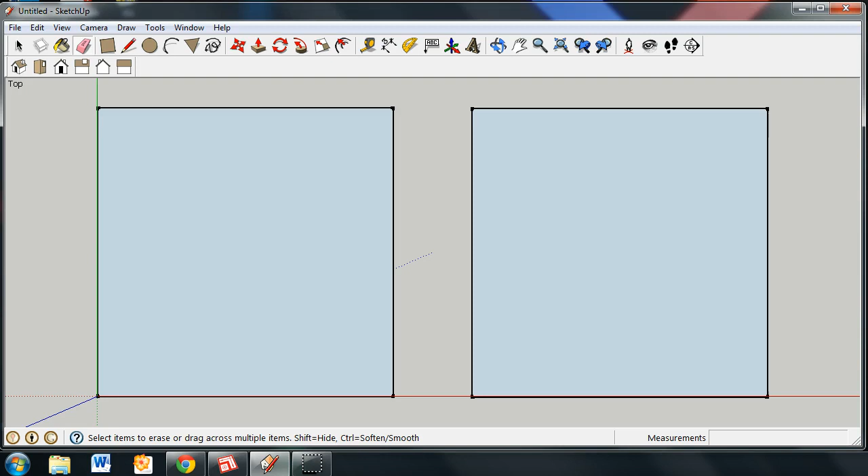Now that I have both of my squares created for puzzle piece number 1 and puzzle piece number 2, I'm now able to take the dimensions included on this drawing and start to put them into the other drawing, the 3D model we're going to produce.

What you're looking at right now is the orthographic drawing, showing what the side profiles will look like in puzzle piece number 1 and puzzle piece number 2. We need these dimensions included in our new drawing so we can create the 3D objects you've already seen in the previous videos.

Let's take the measurements you see here, and start off at the bottom left corner of puzzle piece number 1, calling that our origin, 0,0. For our x value we're going to go across 3/8 of an inch, and for our y value we're going to go 1/4 inch.

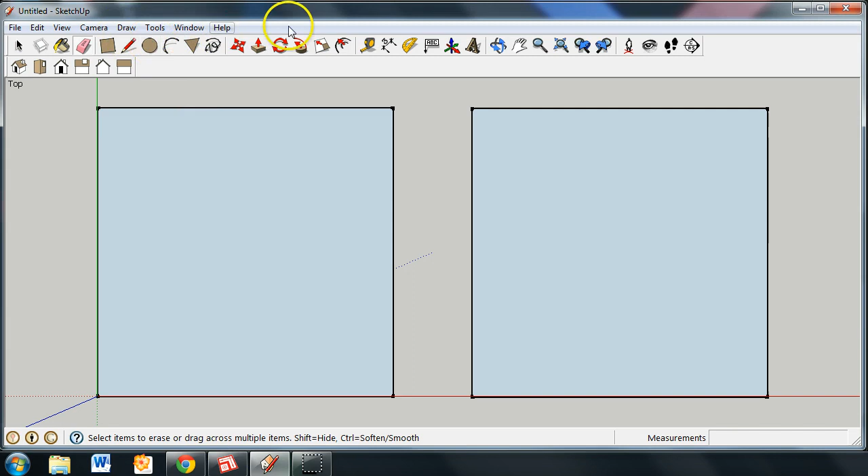I'm going to need those two measurements, so I'll go into my drawing and use my tape measure tool to mark where those measurements should go. I'll click once at the origin, trace up until I see 1/4 inch at the bottom right of the screen, and click once - there's a marking. Then I'll do the same along the x-axis until I find 3/8 of an inch, and click. Now I have two markings.

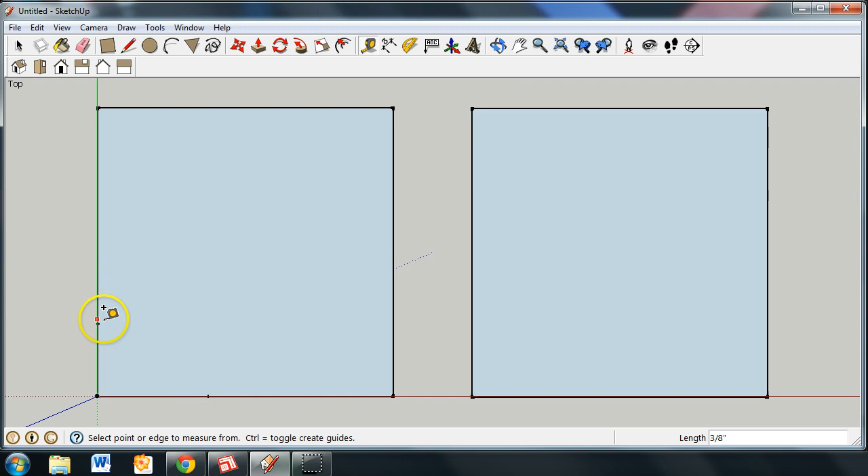Let's go back into the drawing. We notice a marking goes up here, and over and down. How high does it go up? Looking at this measurement, it's 1/4 inch, so it goes up 1/4 inch. Then over - how far over? We don't know by looking at this measurement, we have to look at the measurement at the top, 1/4 inch. So this little open cavity here is 1/4 inch by 1/4 inch.

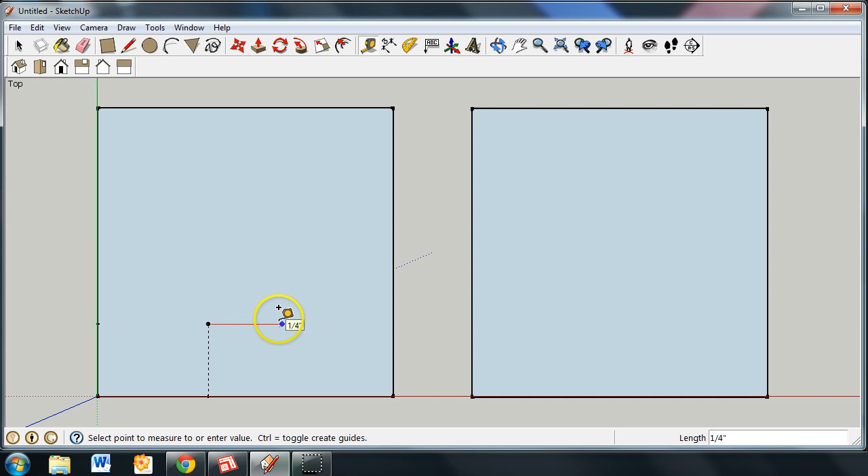Let's draw that out. I'm going to go from here, up 1/4 inch, and you see a hidden line or dashed line appears. Then I'm going to go over 1/4 inch, and back down 1/4 inch.

Let's go back in our drawing. We now have created this little gap here. The last thing I need to do is finish the top side, this left side right here - I've done the bottom side. So we've gone up 1/4 inch, and I need to make an open cavity here too, 1/4 inch deep, 1/4 inch high, and 1/4 inch deep going up again.

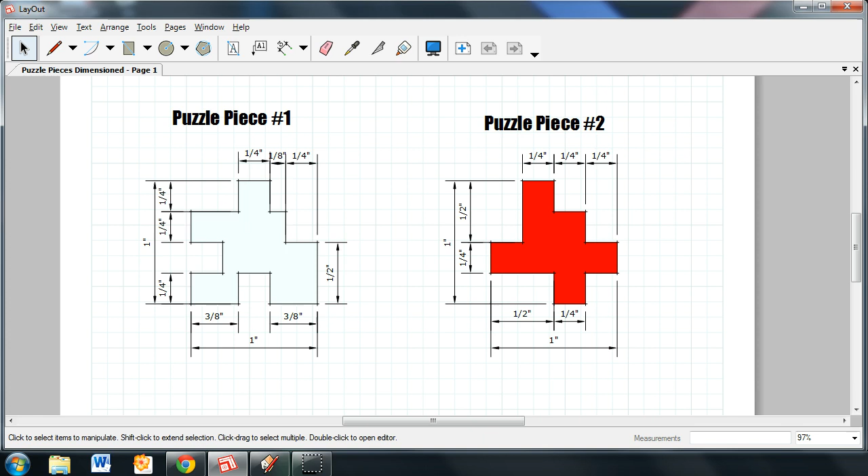Let's go draw those out by coming in 1/4 inch, then coming up, and then back over. Click, back over. Okay, so we're now starting to see what our drawing should look like.

It's going to go up 1/4 inch, and then over - what's this measurement here? 3/8 of an inch. So let's go up 1/4 inch, and let's go over 3/8 of an inch, and back up.

The next measurements I need to look at are these on this top part. I need to go over 1/4 inch, then come back down 1/4 inch, go over 1/8 of an inch, then back down 1/4 inch, and then over to the other side. I should be able to finish the piece up at that point.

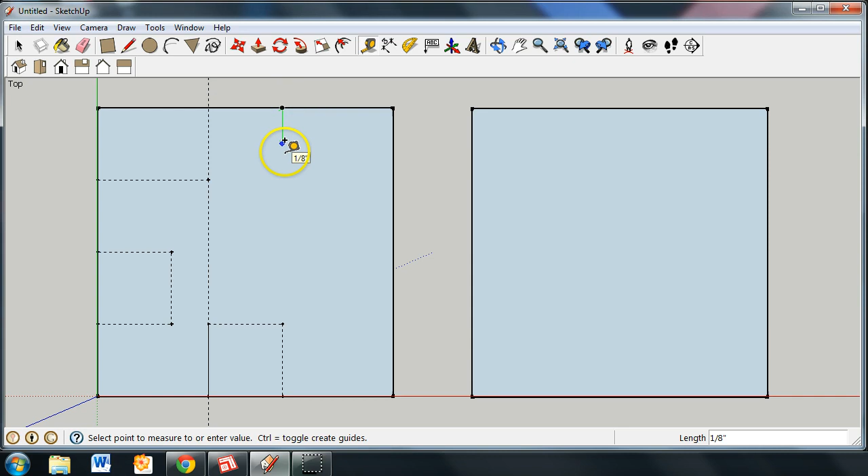So let's go back. I'm going to measure over 1/4 inch, and come back down - 1/8 of an inch, I believe that's what it was. Let's go back. Oh, not 1/8 of an inch - we actually need to come down 1/4 inch. Then go over 1/8 of an inch - there's our 1/8 of an inch. Come back down 1/4 inch.

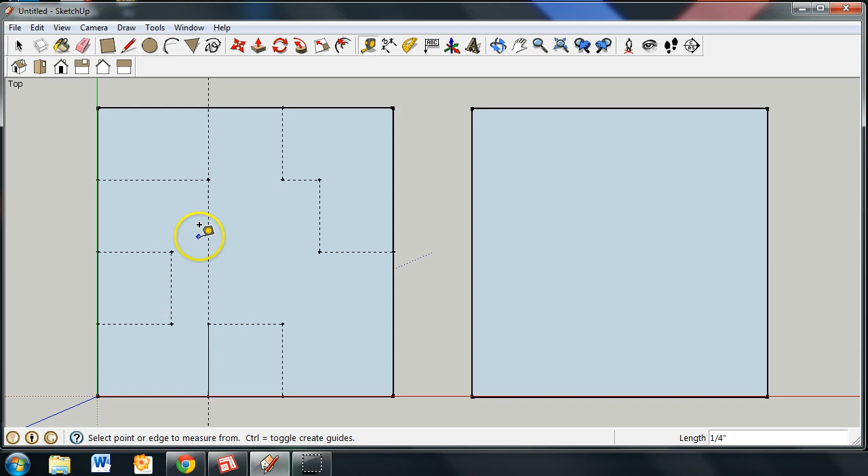And then we're going to come across 1/4 inch. From the looks of it, we can see that we have the overall shape that needs to be created. Let's go back - they pretty much look the same. So all that needs to be done will be completed in the next step.